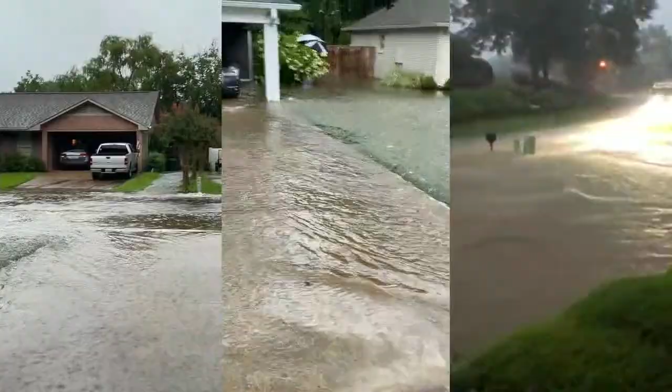The video you see playing — and I know Ms. Kirby, who's here, will find this familiar — shows some flooding that took place about three weeks ago on Academy Drive, which is in Mr. Crow's district. I know Mr. Crow was actually out there that evening. This was a high rain event in Tuscaloosa. It certainly meets all the historical measures, and Mike Gardner and I have talked about this. Sometimes this 100-year flood or 500-year flood — I wish they'd really rethink how they categorize it, because it feels like every week we're having a 500-year flood.

But just for reference, since that is the national standard, our system is built for a 25-year flood. You can see what happened that evening out on Academy Drive. In that video, the two on the left were from Academy Drive, and the one on the far right is video of Hawthorne Circle in Northampton. So we have two locations shown: the Academy Drive neighborhood and the Northampton neighborhood.

So the first set of recommendations deals with the Neighborhood Drainage Fund, and where you see the raindrops on the map are the locations of the projects we're recommending to the City Council. The current drainage fund balance is $3.5 million. If you recall, the council adopted my recommendation just a few months ago to add $3 million into this fund.

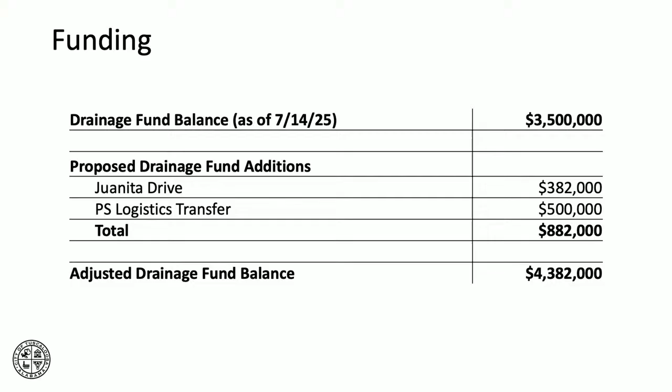We're also proposing to the city council that we reallocate $382,000 from Juanita Drive and $500,000 from the public safety logistics. The Juanita Drive project is at closeout, and the logistics project has come in about $700,000 under budget, so we have available funding that we believe would be good to place into neighborhood drainage. If the council adopted that, my recommendations are based on that assumption, that we would have $4.38 million for neighborhood drainage.

For the following projects: we would recommend Northampton, which Mr. Gardner will talk about in a second, at $800,000. Northampton and Bellview are highlighted because those projects have already been discussed by the city council, and there's already been an indication that once funding was restored, those projects would be in line. So $800,000 for Northampton, $500,000 for the Bellview Drive project, and $1.2 million for the Academy Drive protective buyouts, which would be the buyouts of 3 properties.

$500,000 for the 36th Avenue East Rainbow Drive culvert replacement, $300,000 for the 36th Avenue East drainage, $250,000 for the waterfall drainage improvements, $80,000 for the Oakdale drainage improvements, and $450,000 for the Beverly Heights drainage.

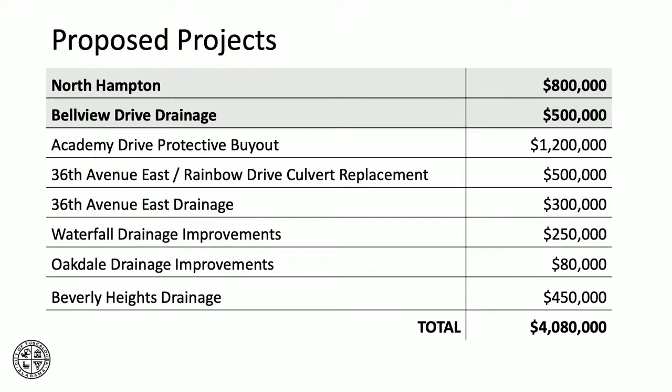So we're going to go through each one of these, and Mr. Gardner and his team are going to walk you through the engineering aspects of them. First is the Northampton drainage. Let's go back and give you an overview of where that is - it's in Mr. Crow's district in North Tuscaloosa, just east of Watermelon Road. Mr. Gardner, you want to walk them through the aspects of the project?

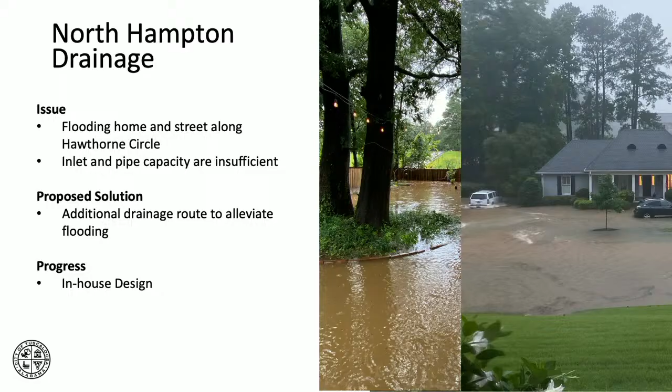It's all under asphalt between homes, so it makes it a difficult challenge to replace that in place. What we decided we want to do is to add an alternate route. That's an approximate representation, but basically we want to capture that water before it gets to the street with another pipe, run that pipe through the rear yard of the neighbors in Northampton, and that eventually gets to the street and connects to the storm sewer that's along Watermelon.

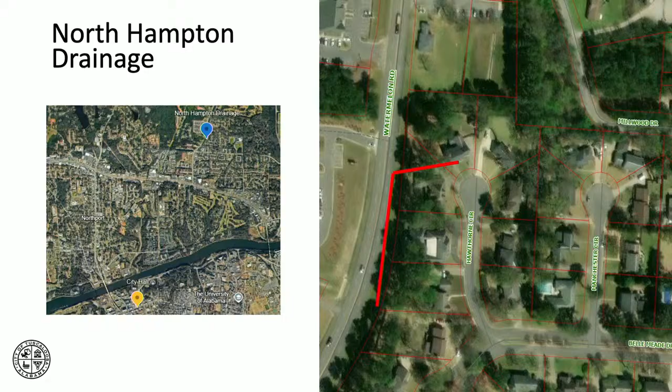We're doing this design in-house. We're about 80% finished with construction plans. The next thing we'll be doing is communicating with the landowners that we need easements from and moving forward to bid.

So today there's a storm sewer pipe that runs between these two houses. You can see an inlet in the road here, and it comes down underneath the roadway, then it turns and runs between these two residences in a pipe, gets out to the right of way of Watermelon Road, and there's a short segment of pipe here before it turns into a ditch. Our plan - and this isn't really in the right location - but it was run behind these homes, along the edge of the back side of these homes, and connect to that system that's here. The stormwater would have two directions to go, and we'd be providing the extra capacity to handle the storm.

The next project is Bellview drainage. So that gives you an overview of where we're talking about.

Y'all are going to hear me say CMP over and over through these presentations, and that stands for corrugated metal pipe. It's a pipe product that was used pretty heavily in the sixties and seventies, and we tended to wane away from it in later years. The city actually banned the use of corrugated metal pipe around 2007. It's a pipe product that's a little more economical, but its lifespan is judged by the acidity of the soil you put it in - the sediment runoff that transports through that pipe degrades the coating, and eventually the pipe rusts.

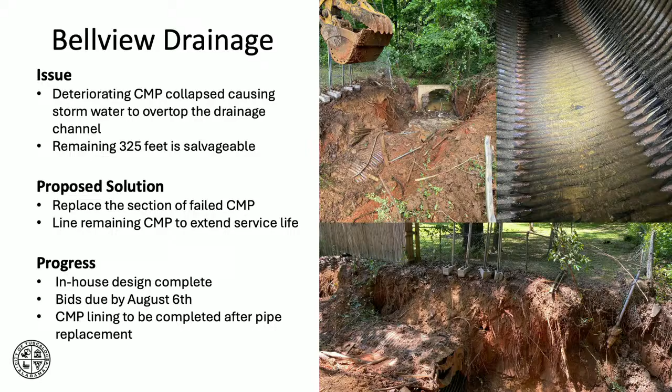What we've done to this point on this project with Public Works help is we've removed that broken piece of pipe that was clogging the channel. It's just an open ditch right now. We need to replace that pipe. Along with that replacement, we want to line the existing corrugated metal pipe that's left, since it's still good enough to salvage. This pipe lining will extend the life of that pipe another 50 to 60 years.

This is another project that our team has tackled in-house. We are actually going to receive bids on this project next week. We've secured the easements, and we're ready to go. This will address Third Court East as well - that pipe was causing the flood in Third Court East.

When you and I met, I think you went around to Bellevue. This is a different location. It's in Bellevue on the next road. I know it, yeah, we went to the ditch down below that. That water that we looked at eventually gets to this. Yes, that's right.

The next project we're recommending is property buyouts on Academy Drive, 3 property buyouts in particular. Mike, you want to touch on these?

Academy Drive, again, a neighborhood built in the 70s. There are several issues in this neighborhood. We have the creek that overtops the banks and also floods Stone River Road. When the water crosses Stone River Road, it isolates 27 homes on Stone River, Chickamauga, and Fredericksburg. Those people have no way out.

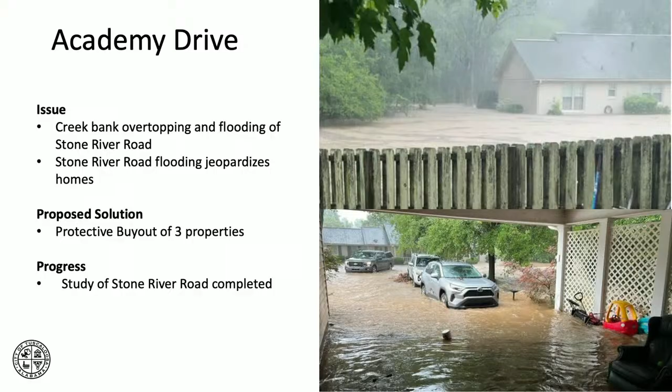So in the short term, what we want to do is a protective buyout. This is a residence of the Limbaughs, the Kirbys, and the Goldsmiths. Two of those residences are right there on Stone River. The Kirby home is on Antietam.

We'll talk a little later about the other issues in the Noah's Ark portion of this presentation. One driving force behind this was that Mike and I looked at the engineering improvements you'll see in the Noah's Ark recommendation. The 3 properties we're requesting purchasing - voluntary, by the way - even with the improvements that would be made, would not have prevented their flooding 3 to 4 weeks ago, on the date this flooding happened. We also think this could be a good opportunity to limit the scope of future issues in that area, in the meantime between the project happening today and the project happening in the future.

So a little over a year ago, y'all authorized us and we proceeded with a study of the Academy Drive neighborhood as a whole. The results of that study have indicated several of these issues we're talking about: the insufficient capacity of the culvert under Stone River, the hydraulic efficiency of the channel itself, the bends, and the debris that captures in it, those types of things.

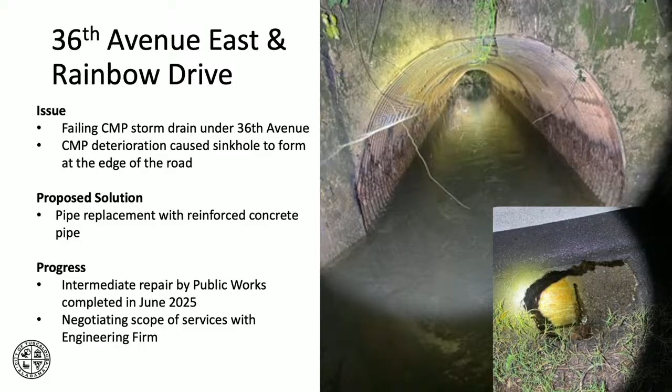We've got a joint failure in particular at this location, and it's allowing sediment to leave the roadbed surface into the pipe and travel on down with the water. So here, we're looking at a full pipe replacement across the road - replacing that corrugated metal pipe with a reinforced concrete pipe. Life expectancy of concrete pipes is over 100 years.

We've already begun negotiations with an engineering firm on scope of services, and we'll be coming to you with that here in the next few weeks.

Mr. Tyner will be in his 34th term when we have to replace that pipe again. All right, I can't wait. I have no doubt, Mr. Tyner, you will be.

All right, 36th Avenue East. The best way for me to give you a landmark on this is we're behind the Barclay dealership that fronts on Skyland.

We have a sanitary sewer system that's running cross country in this area. Over the years, you can see what's happened with this stream channel, the erosive effects. It's just a real erosive soil in this area.

Point out to you the black pipe that you see in the upper image. That's one of our major sanitary sewer mains. What's happened over the years, and we're not sure how long this has been going on, but probably several years, 8 to 10 years maybe, is the erosion of the channel has exposed the pipe. It's left some of the pipe exposed in the air, and what's going to eventually happen is the pipe will collapse. It can't support itself. It doesn't have any more dirt to support it.

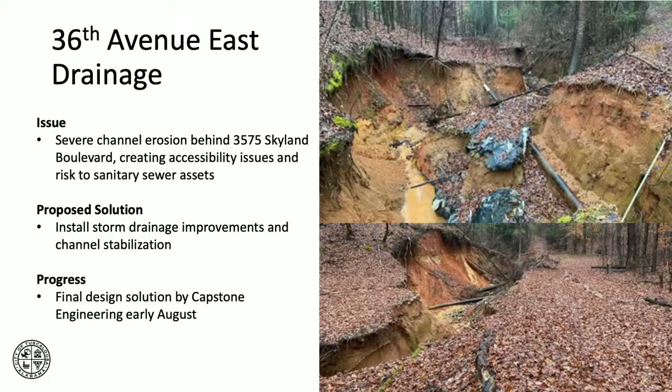Next project is in the Waterfall neighborhood. This area here on Waterfall Parkway is the road that parallels Lake Tuscaloosa. There's a large accumulation of stormwater runoff as you head downhill on the road. It's on a fairly flat slope.

And what happens is during rain events, the water basically gets deep enough to cover the entire road. The last residence on this street before you reach the roundabout, the water's gotten so deep at that point that it overtops their driveway, runs down into their yard, into their garage, and the image on the top left is the erosive effect of that water through their yard. You can see it's fairly significant.

The solution here is we need to capture the storm sewer that's just beyond this home and bring it up the street. It's probably around 200 feet, maybe a little more, and install some inlets along that side of the street to capture that water and take it underground before it overtops and enters that property.

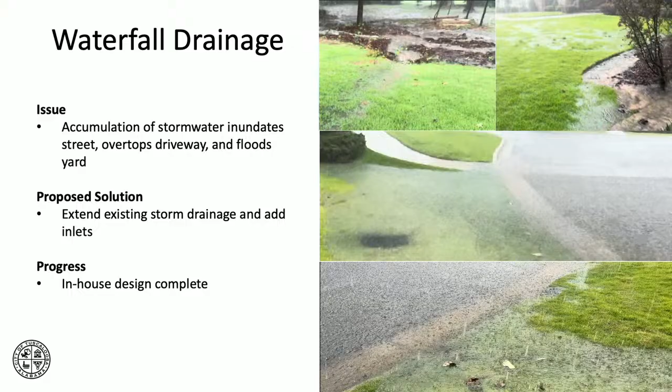That's another project that we're doing the design in-house, and we'll be ready to take this one to bid early fall.

Oakdale? All right, Oakdale, neighborhood probably built in the sixties. Several drainage ditches in the Oakdale neighborhood. We started this project a year and a half ago, somewhere in that neighborhood. Phase one and phase two were complete.

This neighborhood was developed with earthen ditches, splitting the property lines, running either in the rear yards or between two homes or whatever. Over the years, we've struggled with keeping those ditches free. They get overgrown, the grass captures any sediment that's headed down the channel, and then we end up with water standing. You'll look at the image on the top, you'll see where the water's trying to leave the street and head down one of these grass ditches, and it's ponded up.

Our solution is the image on the bottom, where we've gone in and concrete lined the ditch, smoothed out the grade. The channel is wide enough that our public works team can take a bobcat, some small piece of equipment, and very efficiently maintain it.

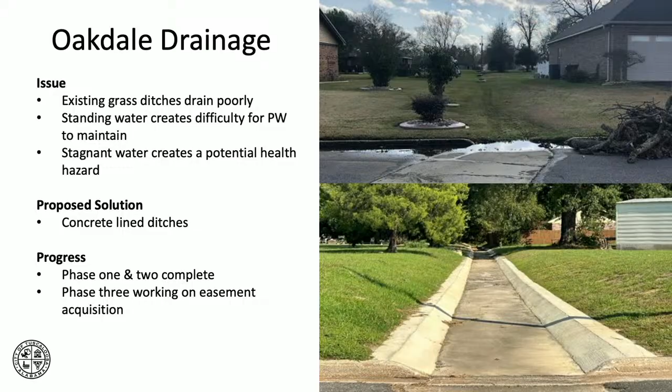So phase three of Oakdale is to finish the third ditch, finish that project off. I can't say enough about our public works crews that actually built those drainage ditches. Selvin took me out there one afternoon, and to see what our men were doing was pretty phenomenal. So saved the city money, outstanding work by our team out there, and Mr. Green's crews.

Beverly Heights. Beverly Heights, if you're not familiar, is on the south side of University Boulevard. We're over in the Alberta City here.

The rectangle that you see outlined in red there is the area of concern or improvement.

At Beverly Heights, we have a storm pipe system that captures the water that runs down a ditch and carries it under the street. Then it turns back into an open ditch. Basically the storm system's not carrying the water. It backs the water up in the ditch. You can see that it actually gets deep enough that it touches this house that's adjacent to the stream bed.

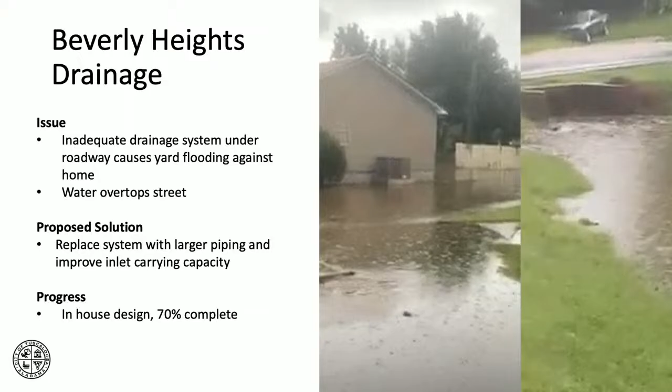Also overtops the road at this location. I think that's 31 Beverly Heights. Is that back by the railroad? So we're north of the railroad, but it is headed toward the railroad.

That lower end of the rectangle there, Councilor, is where it crosses under the road, and then the next thing it goes under is the railroad.

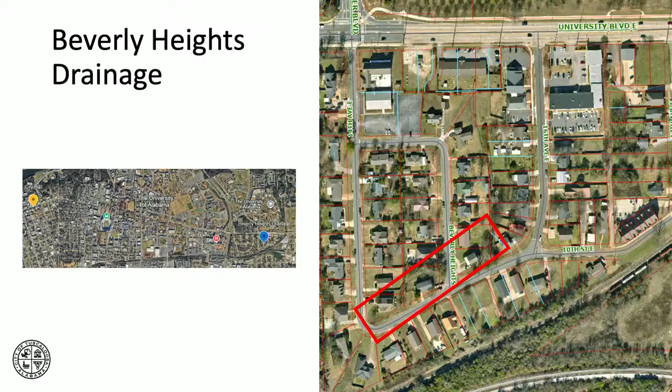So again, this is a project that we're tackling in-house. The solution is to increase the carrying capacity of the storm system underneath the road, and probably do some ditch improvements along the way. The pipe underneath the roadway in the curve down at the lower end of the rectangle is sufficient, it's able to carry the amount of water, but the next street up is not.

Any questions on Beverly Heights? No, sir. Okay, so any questions on the neighborhood drainage projects?

So as you'll see with the Noah's Ark projects, we plan on putting these on the agenda of both public projects and finance. The finance portion would be for the Juanita Drive reallocation of dollars and the public safety logistics reallocation of dollars. The public projects portion would be for the approval of the projects. Assuming you get the other side of the house with finance done, then those projects will be ready to rock and roll.

What are we distinguishing between neighborhood drainage and Noah's Ark magnitude? Magnitude and long term, whereas these projects are immediate. Neighborhood drainage, those are feasibly manageable near-term projects with money we've got. We can lay hands on that.

Yes, sir, and immediate, meaning you could go to your constituents and immediately know - when I say immediate, I mean in the next 12 to 18 months.

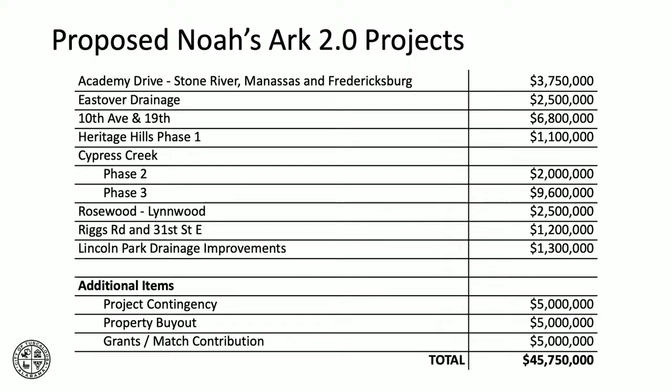The largest scale project in this recommendation is Cypress Creek, phases 2 and 3. I believe this extends a little into Ms. Howard's district, but primarily Mr. Lanier's district. Rosewood, Lynnwood at 2.5, Riggs Road, 31st Street East, and Lincoln Park Drainage would both be in District 1. Let me go through the recommendations and have Mike talk about their score and the concept for improvements.

I need to ask about the last one we talked about, the very first list. Is Academy Drive on top of this, or in addition to the property? That's coming out of that. Beverly Heights is not on this list, it's already on the other one. That's correct, yes.

Thank you. So here you can see the rating, this one scored the highest of everything we scored. The two main reasons are the travel impedance we mentioned, which isolates 27 homes, and the houses that are getting flooded. Of those two major categories, this project checks both boxes.

The estimate here is $3,750,000. I mentioned earlier we'd already engaged a consulting engineer who provided us a drainage study for the entire corridor, all the way from McFarland, where it crosses under and goes to Indian Hills, all the way up to Rice Valley Road.

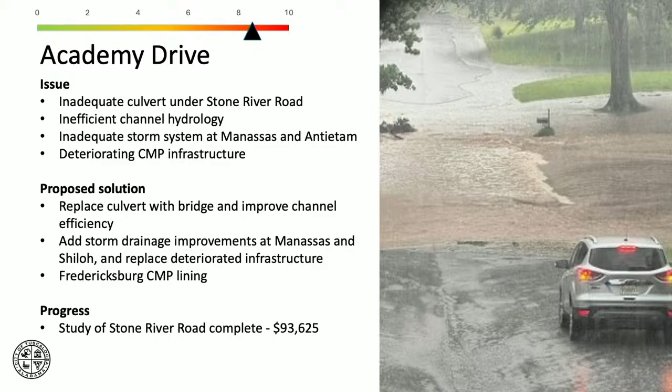The storm system at Manassas Avenue cuts across a few neighborhood yards and ultimately crosses Antietam and empties into the creek. Good old corrugated metal pipe. We've done a couple minor repairs on a small sinkhole in a residence yard there. There's a convoluted number of pipes that go from a larger pipe to a smaller pipe, back to a bigger pipe. The analysis is that we'll probably add another storm line to this system, taking it down Manassas and down Shiloh and emptying into the creek, similar to what I mentioned about Northampton. We'll have a pipe network that goes two directions and allows water to flow both ways, alleviating the flooding problem. We'll also address the deteriorating corrugated metal pipe through lining and/or replacement.

Any questions on that one? I failed to mention there's a pipe on Fredericksburg that needs to be lined. We can salvage that corrugated metal pipe, there's one beginning to get deficient on Fredericksburg that we'll line as well.

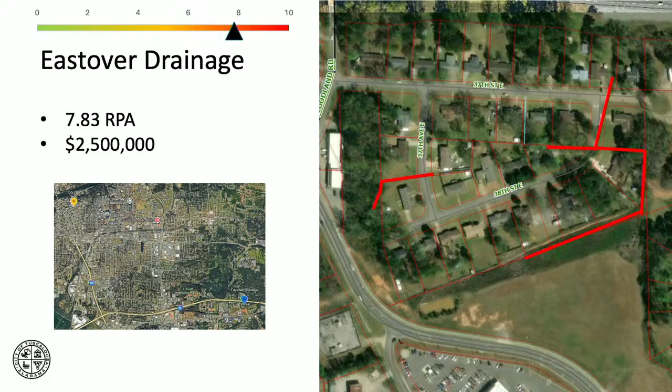All right, Eastover. In Eastover, we have a significant flooding problem at the intersection of 37th Avenue East, 37th Street, and 38th Street. There's a slide that represents that on the next page, showing some pretty severe roadway flooding. Again, we've got corrugated metal pipes scattered throughout this neighborhood. Our public works team has made point repairs and patched the road at least twice in the last 18 months that I'm aware of.

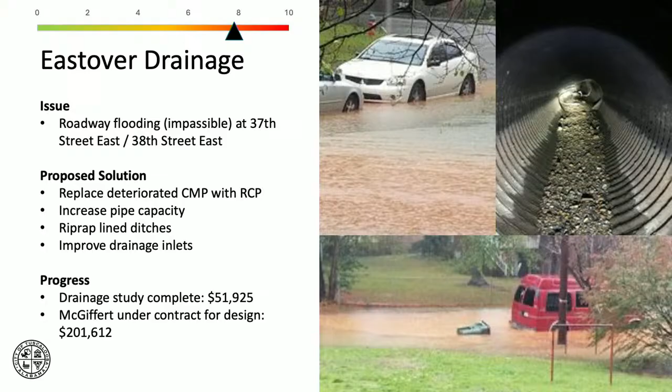In this plan, we'll be replacing the deteriorated pipe with concrete pipe. We'll look to improve the efficiency of the storm system by increasing pipe capacity and doing some pipe replacements. We have some ditch sections that need to become more efficient and better protected than they are today, and we'll create more surface inlets to allow this water to get into the system. That project is under design with consultants, and we're expecting preliminary plans next month.

10th Avenue and 19th Street.

This issue really begins at the very southwest corner of the Central High School campus, at 17th and Black Bears Way on 10th Avenue. That's basically where the storm network begins, travels south down 10th Avenue, works its way through a couple of neighborhood houses, and ultimately ends up on Hargrove Road, with the final discharge into a creek or ditch along the east side of Bonita Terrace.

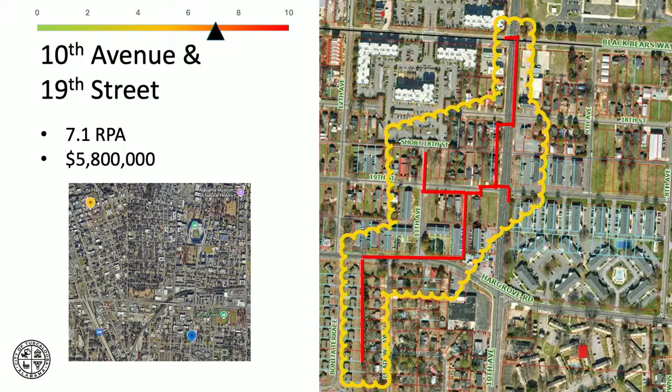We have had a study prepared by a consultant, and based on their recommendations, let's go to the next slide to give you a little magnitude.

The top right photo, you're looking at 10th Avenue there, looking across the street, I think you're on 19th, looking across, and the police car's on the other side of 10th Avenue. 10th Avenue flooded in that image.

The image below is a house on 19th Street that's impacted by this flooding. And then the top left image is the channel I mentioned, adjacent to the east side of Bonita Terrace, and it's suffering from a lot of scour and erosion. That sediment's going somewhere, probably potentially causing some issues farther downstream.

Here we will be looking at replacing the pipe networks that are deteriorating, increasing our pipe capacity, improving the inlet capacity where water can leave the street and get into the system, and lastly, regrading and stabilizing the channel in the Bonita Terrace network.

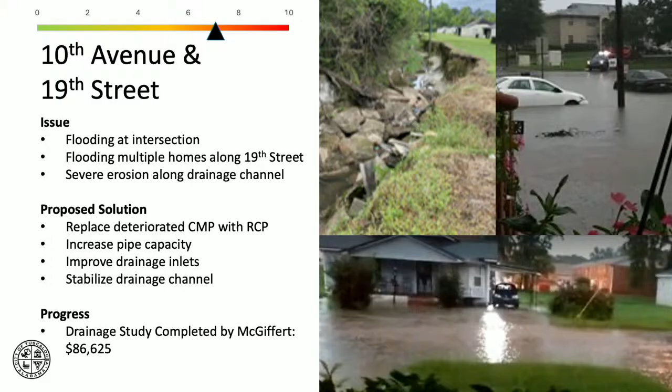Heritage Hills Phase 1. This is the western side of the Heritage Hills neighborhood. This one has issues with water on top of the streets. We do have one resident who has suffered the consequences of water damage in their home.

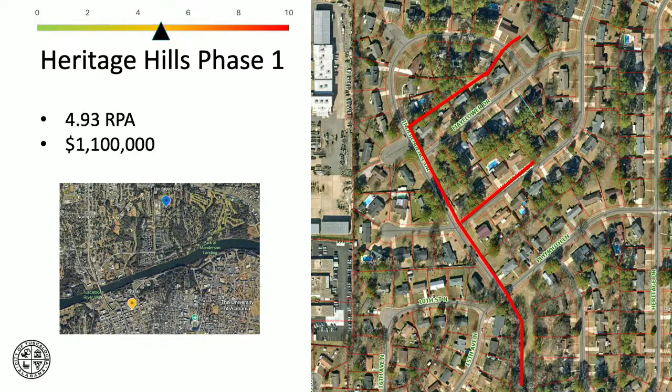If you look at the next slide, the bottom image is obviously a roadway flood, and we've got to deal with that. The two photos on the top are images taken after the rain event - the water subsided some, but you can see that it's into that person's home.

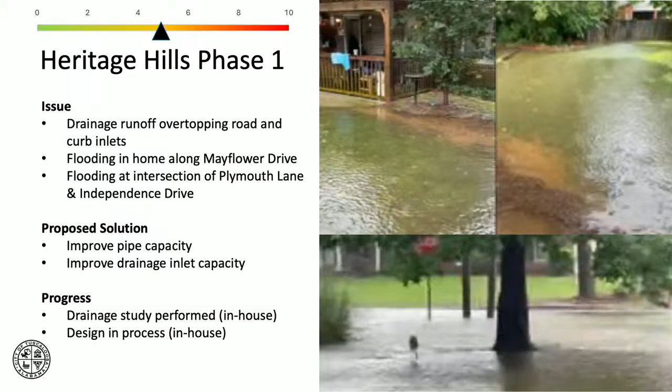We've analyzed this system. This is another project that our team has taken on in-house. There are segments of the pipe network that are sufficient, and other segments of the pipe network that are inadequate. So the plan is to go in and make those improvements to the storm system, create better opportunities for the water to get out of the roadway. We're on target to probably bid this one right after the first of the year.

Cypress Creek Phase 2. We came before you a few months ago, and we actually called this Cypress Creek Phase 8, and that dates back to 2013. Our consultant did a holistic study of Cypress Creek all the way from 36th Avenue to Highway 69, and they broke it up into a multitude of phases or segments. We simplified this, and we decided we would change Phase 8 to Phase 2, and then Phase 3 is going to be the rest of it.

For Phase 2, that is from the west side of McFarland Boulevard, Long Creek Channel, to Longview Drive. This will be stream bank protection improvements, also shoring up the infrastructure that we have in this area. We've got some sanitary sewer that runs parallel to the storm system, and also crosses it in a place or two. This will also stop some erosion loss.

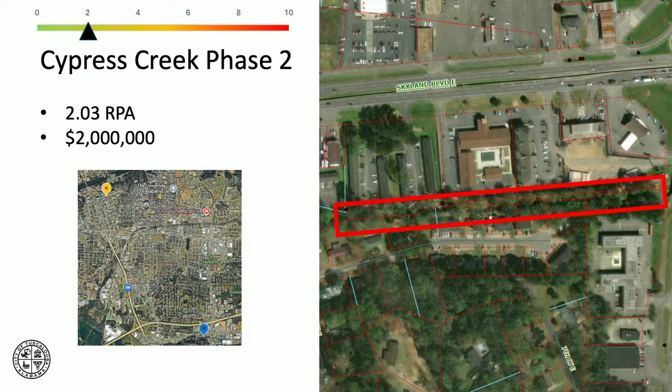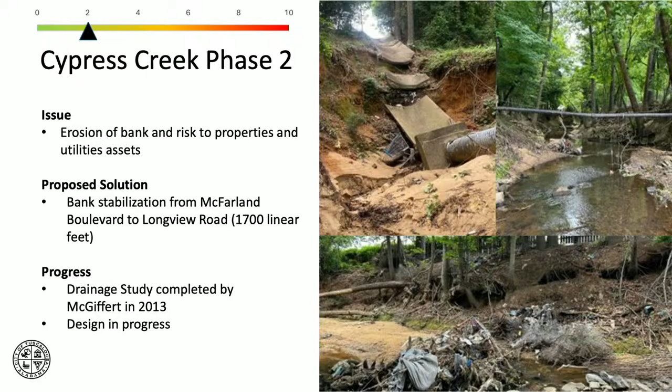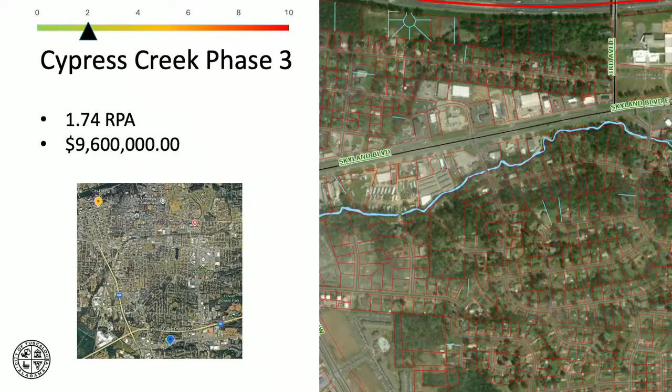So Cypress Creek Phase 3, this estimate's $9.6 million, about 1.2 miles. Quite a few things will happen, but the majority of what we'll be doing here is bank stabilization. This gives us the opportunity to go in here under a permit issued by the U.S. Army Corps of Engineers - we'll be able to remove trees and roots that are impediments to the flow of the water, set up some channel protection measures. There's a box culvert that we need to add under a roadway to improve hydraulic efficiency as well, and some sediment cleanup. That pretty much encompasses Phase 3, and again, it goes from Longview Road all the way to Highway 69 South.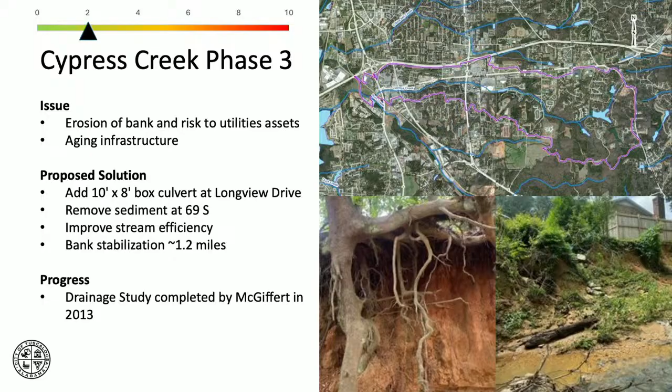Rosewood-Lynnwood. Mayor, I don't remember for sure whether Phase 1 was a Noah's Ark project or it was a Noah's Ark. So - I actually did that.

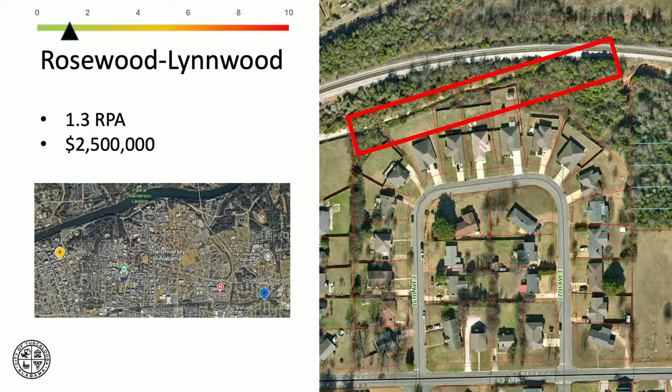Phase 2 of this is going to be a continuation of what was done, I think around 2014. We're concrete lining a channel. Mr. Green's been before you a couple of times over the last few years regarding this. We do a clean out, called the Southern Gardens pipe clean out, due to a lot of sediment loss in this channel. What the city has done over the past is concrete line this, and this is the last piece that needs to be lined, roughly 800 feet.

Basically nothing else to show. Once this is complete, it will connect to the ditch that's paralleling and running along the railroad right of way. Fortunately for us, they did a good job protecting their ditch about 2 or 3 years ago, from Kicker Road back west to where this project will terminate. They've done a pretty good job of riprap, so this should greatly minimize any erosive efforts we're having to clean out in the future.

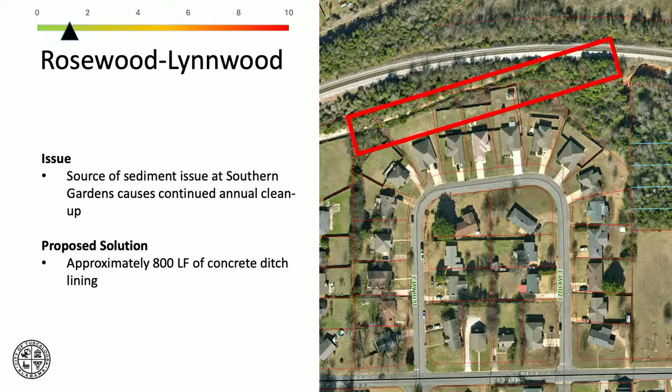So the next one is Riggs Road and 31st Street East. The area you see encompassed in red.

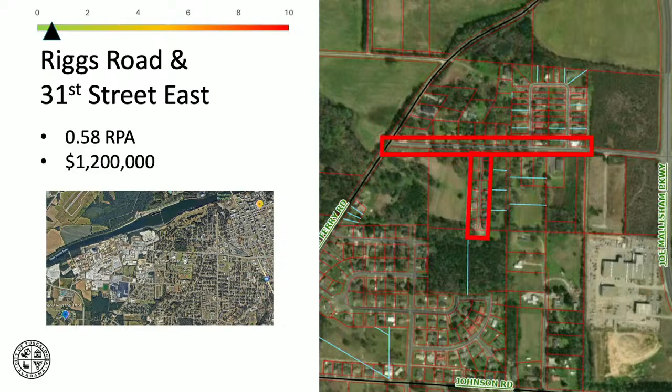If y'all are familiar with this area, it's very flat, very little change or relief in the topography, with roadside ditches that have been there as long as the road's been there. Public Works does a tremendous job trying to maintain these, but there are areas where water ponds. Even in a small rain event, we end up with ponding water that can become stagnant and a potential health hazard. Our overview is that we need to go in and probably look at concrete lining these ditches.

Our preliminary investigation shows that some of the side drain pipes that access driveways and sidewalks to residences are not flowing in the proper direction, so we're including that in our design and cost estimate. We just need to get that water to flow, with water flowing back to the east, entering a drainage channel that heads south toward tractor equipment.

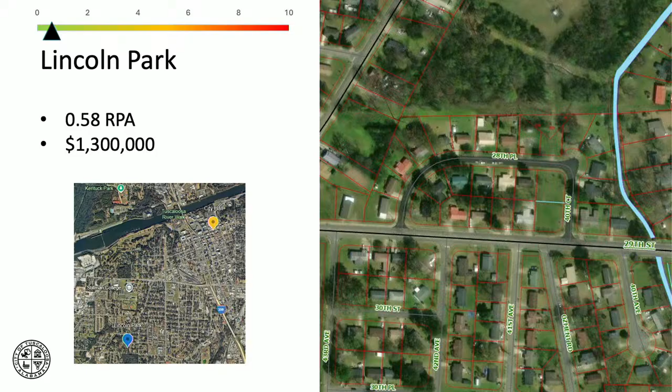So the last one on our list is Lincoln Park, a somewhat similar situation to what we just talked about on Riggs Road. This is an image of some ditches that just don't drain well. You can see the result gets precariously close to homes. I don't think it gets in the house, but it's obviously standing water, and the residents are having to wait for this water to dissipate.

Our proposal here is that we need to take this road, which doesn't have curb and gutter or any drainage infrastructure, and turn it into a road with curb and gutter, proper storm drainage inlets, and tie it to the network that's already there.

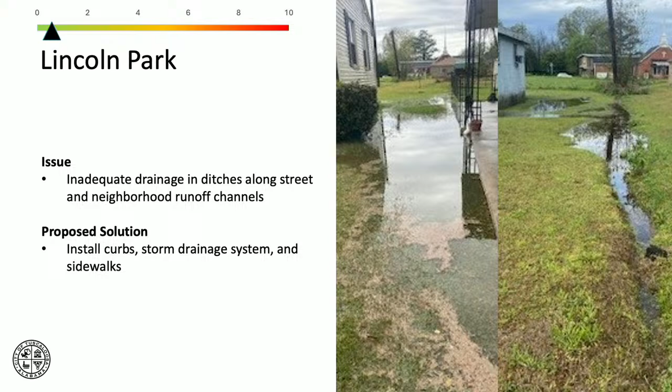So those are the projects we're recommending. We know you're going to, over the next few weeks, want to spend more time going through each project. Let me talk about funding this.

This certainly can be funded through general fund, and underneath general fund is Elevate. How we want to work through that in the coming weeks, I want to sit down and talk with you about it. Noah's Ark was purely a general fund bond issuance that we knew we would incur debt on, and ultimately that means at the end of the year, your surplus transfer is going to be a little lower depending upon what you believe the debt service to be. If you were today to say $45.7 million, that's what we want to do, the debt service would be estimated at $2.8 to $2.9 million a year for 30 years. So that gives you a sense.

If you do less, the debt service number obviously goes down. If you wanted to do more, that debt service number goes up. We think that 2.8 is a good cap, just kind of projecting out over the next 10 years. But that gives you a good starting point. We would not recommend, though, going to the bond market until '27 or '28. The reason why is, unlike a Saban Center where you get a bid that gives you a clear idea of what you're going to go out with, or a park...

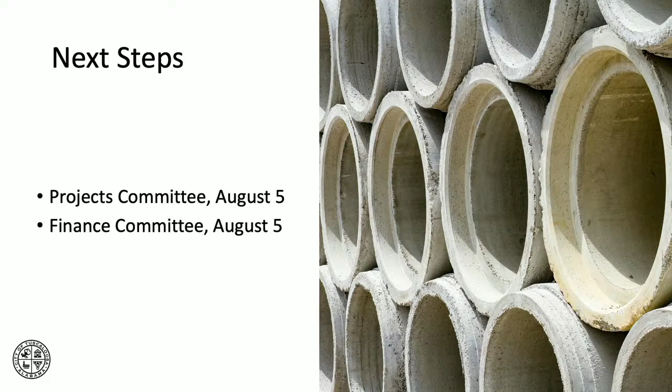In my 20-year career, this is only the second time. So this is something we certainly would... there's no urgency in terms of approving the large scale projects.

I would say the neighborhood drainage projects—if we could get priority moving on those first. If the council's going to prioritize, we'd rather deal with those neighborhood drainage projects first, get them going, because we can get some short-term impacts made there, and then turn to Noah's Ark.

Again, I want to thank our team members who've worked the last 6 to 7 weeks putting this together. I want to thank you—I think I've met individually with each one of you on this subject, and appreciate your input. I don't envy the task now you have, but we want to work with you and provide you whatever you need as you begin making your decision.

So, question, Mr. Crowe—in the budget that we will see in just a handful of weeks, are you putting money back into neighborhood drainage outside of this for the next budget year?

The only two—no, we do the neighborhood drainage when we get the annual surplus in the capital. Would you anticipate... that depending on what that is, we would probably replenish some money in that. Oh, absolutely.

Most of the year? Because the reason I'm asking is I think there are some of these projects we've looked at over the last year that we probably could fund a little bit and maybe add some other things in it. I'm thinking specifically, selfishly, in my district, there's one on Academy Drive that is a potential sinkhole we've been looking at, Miss Tootle, for example. I know that's in there, but it might be something we could get done before we had to do a bond.